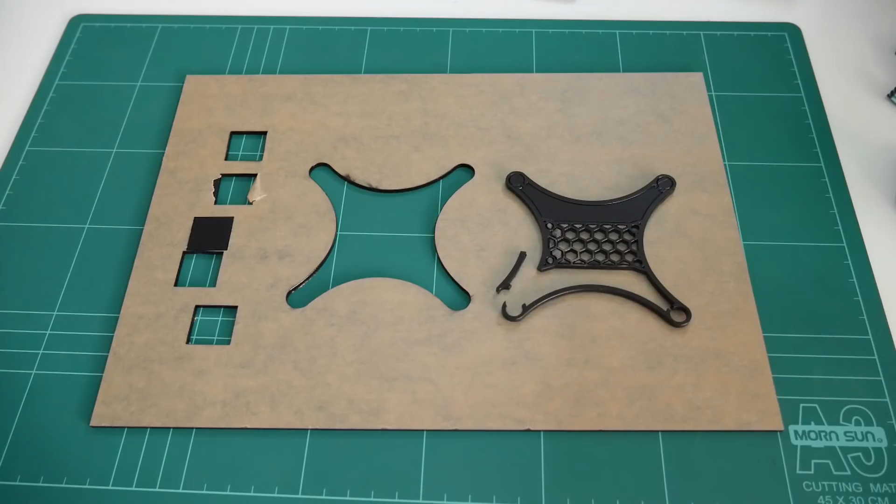In a previous video, I demonstrated cutting 3mm acrylic using a 2.5 watt laser attached to my 3D printer. But when cutting a complex shape, such as this mini quadcopter frame, I experienced a problem whereby the outer perimeter cut would cause the entire piece to lift.

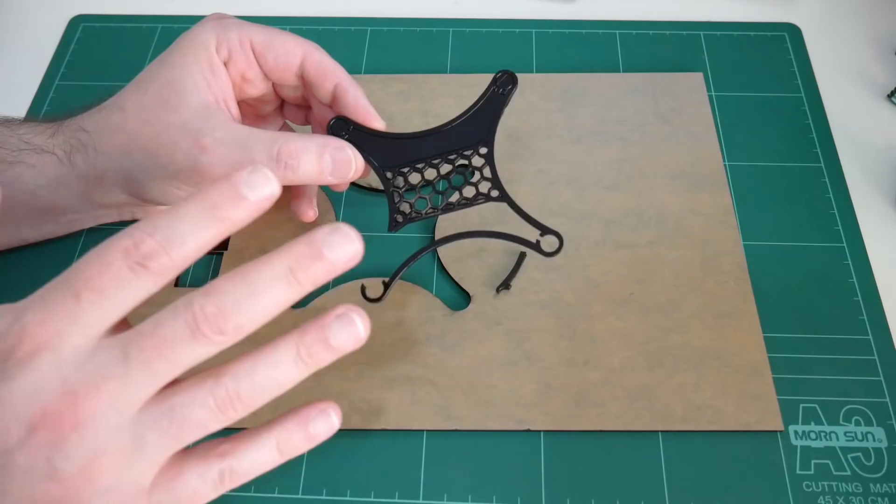Now, as this piece took 3 passes of the laser to cut all the way through, this meant the next laser pass wouldn't line up with the previous laser pass, causing some areas not to fully cut all the way through. So in this video, we'll use Fusion 360 to create our laser G-code, laser cutting the inside shapes first, followed by the outer perimeter.

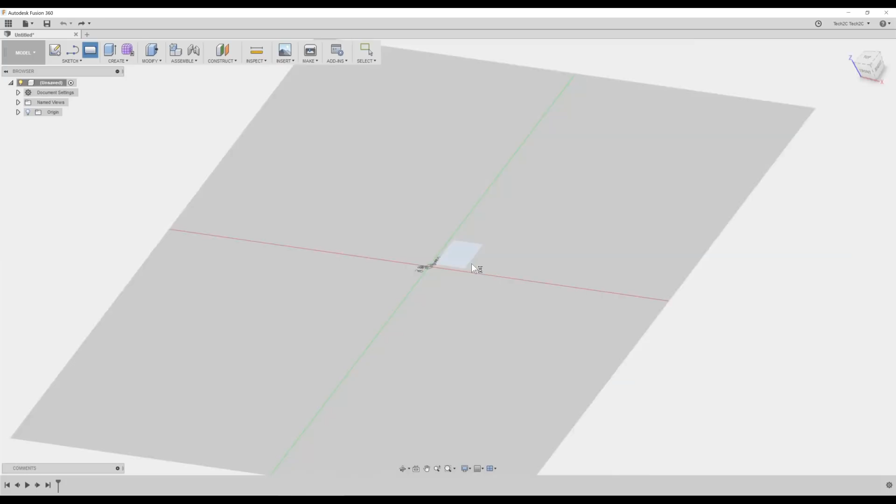To begin, in Fusion 360, first let's create a square on the XY plane. Starting from position 0, the size will be 200mm by 200mm. Highlight this square, right click and select construction. This is the size of our build platform.

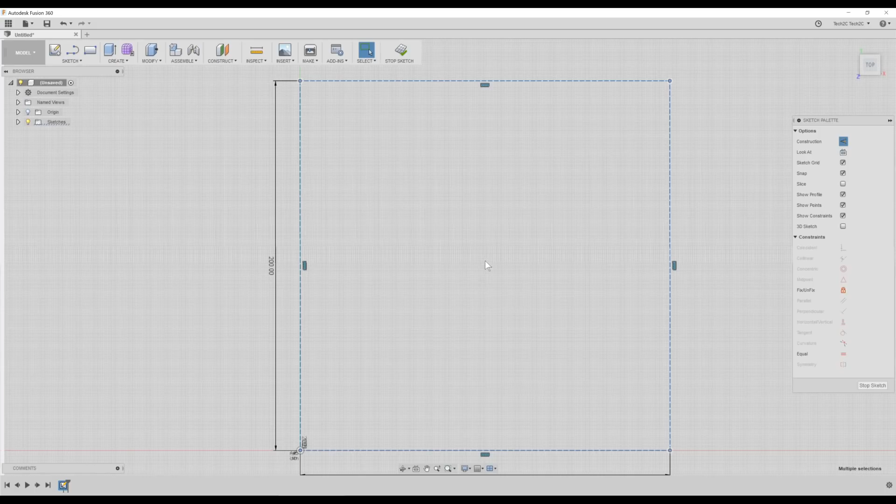Now to import the exact same micro quadcopter frame into Fusion 360, it's currently an STL file, so we need to be able to convert that into a solid before we can work with it. To do that, we'll go to Create Base Feature, then Insert Mesh, and we can choose our STL file.

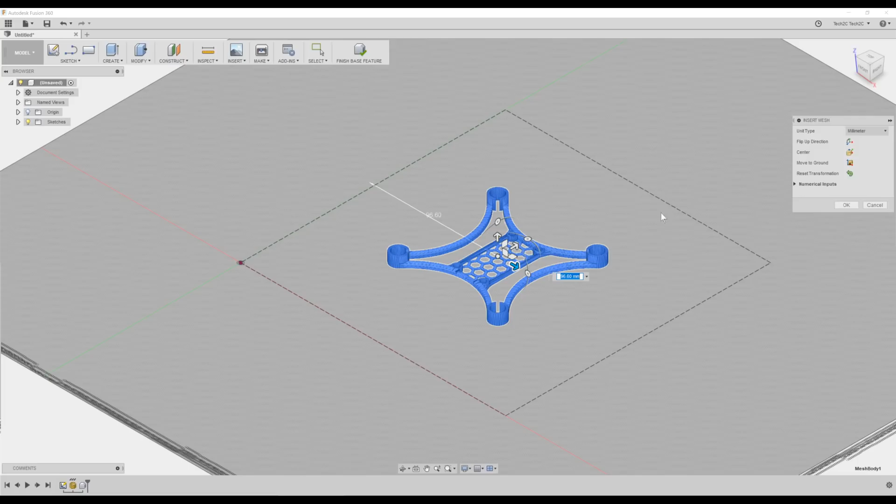We want to drag this file into the square we created earlier, just to make sure that the size is well within our build platform area, which it is, and select OK. Now that we've inserted our STL file into Fusion, we can convert this into a solid. To do that, right click on the object and choose Mesh to BREP.

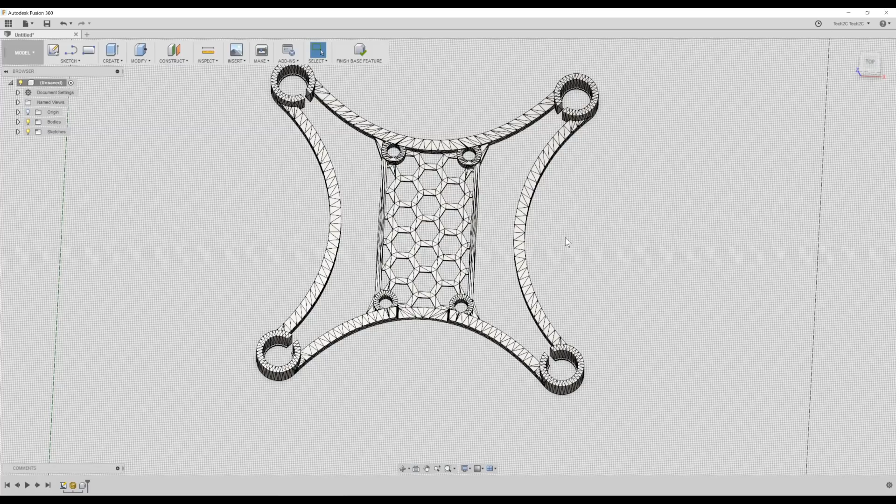Fusion has now converted this into an object, and if we zoom in, we can see that we can actually select the individual vertices, faces and lines. Now we can choose Finish Base Feature.

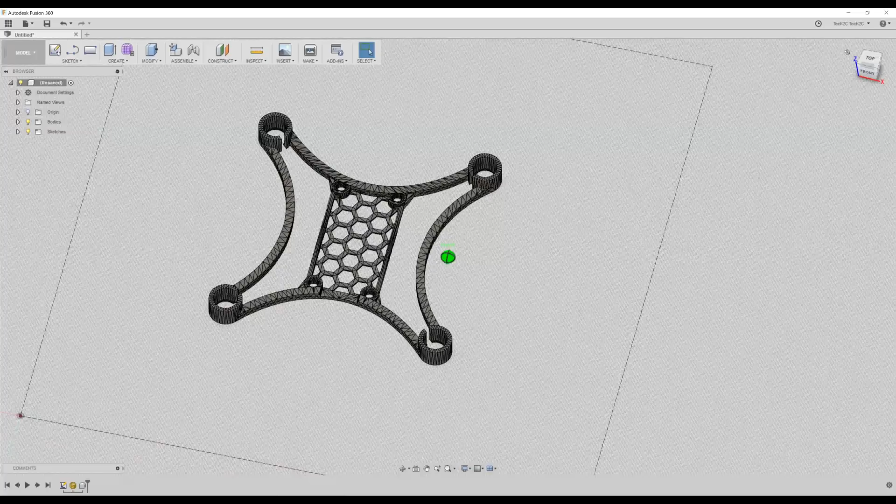What we want to do here is project the bottom shape of this micro quad onto the XY plane, because all we want is the bottom shape. That's all we can laser cut with our laser. To do that, from the sketch drop down, we'll choose Project, and it's asking for which plane we want to project, and the plane is the X and Y plane.

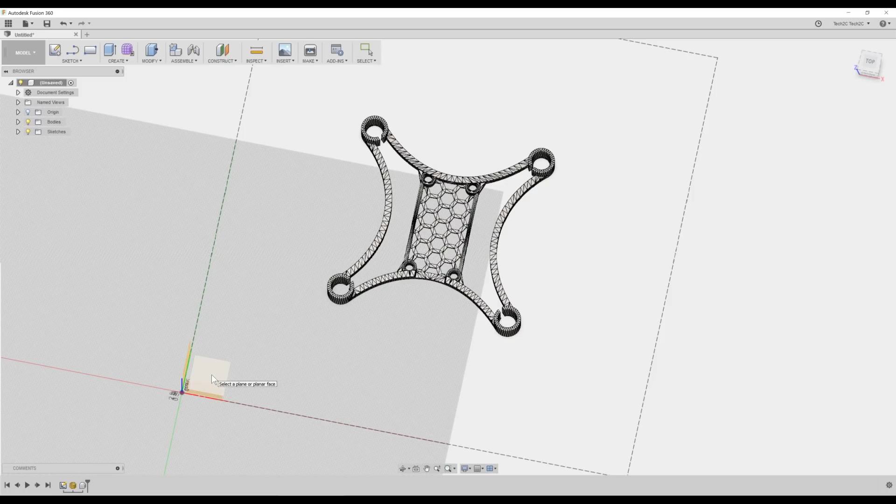From the right hand side, select Bodies and select the quadcopter frame. This does take a little while to finish, and there it is. It has selected everything on the X and Y plane for this particular shape. Choose OK and Stop Sketch.

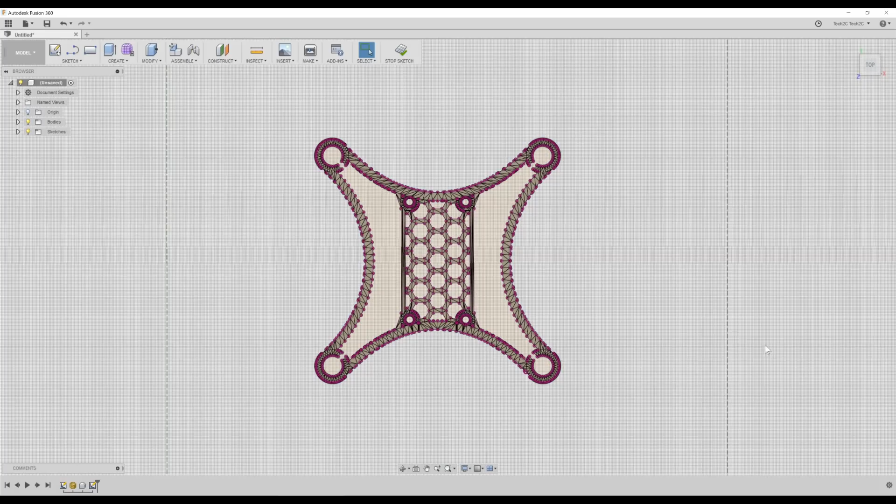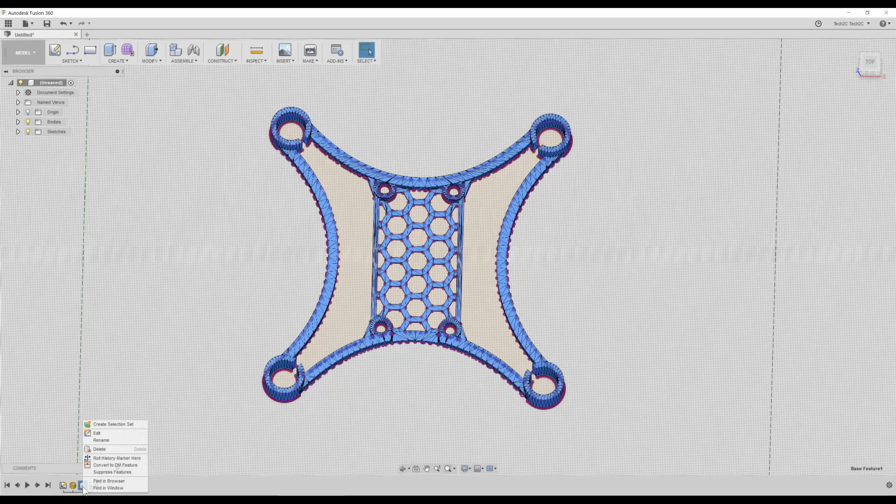Now that we have our sketch on the X and Y plane, we no longer need the 3D model, so we can now delete it. So in the timeline, we can right click the object and choose Delete, and right click the mesh and choose Delete, which just leaves the outline from the X and Y plane of this particular object.

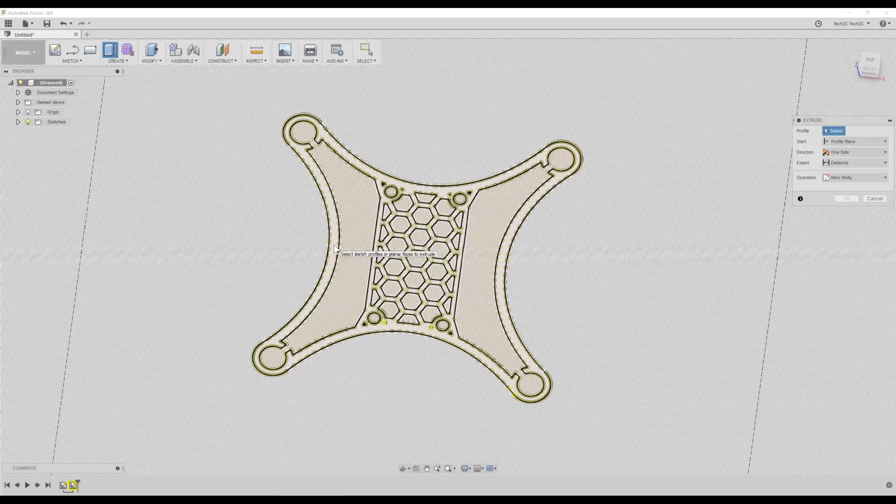Now we need to give this some depth, so the CAM process in Fusion 360 can work with this particular shape. To do that, we'll choose Extrude from the menu, click on the shape, and we'll extrude, say, 1mm. And there it is. There is the 2-dimensional shape of this mini quadcopter that we're going to laser cut on our 3D printer.

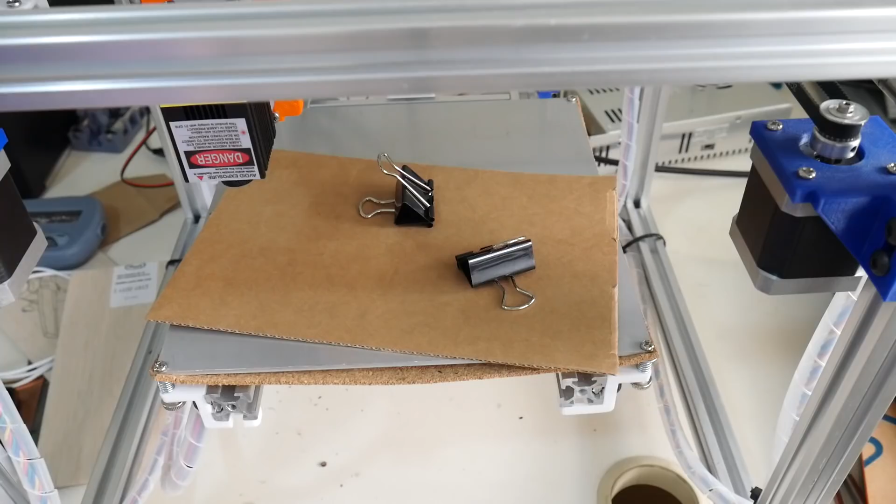For this example, we're going to cut that same micro quadcopter shape, but out of cardboard instead of acrylic, just to save a bit of time here. But we're still going to need 2 passes to cut cleanly all the way through this cardboard, but we can do that at 5mm a second, so that shouldn't take too long.

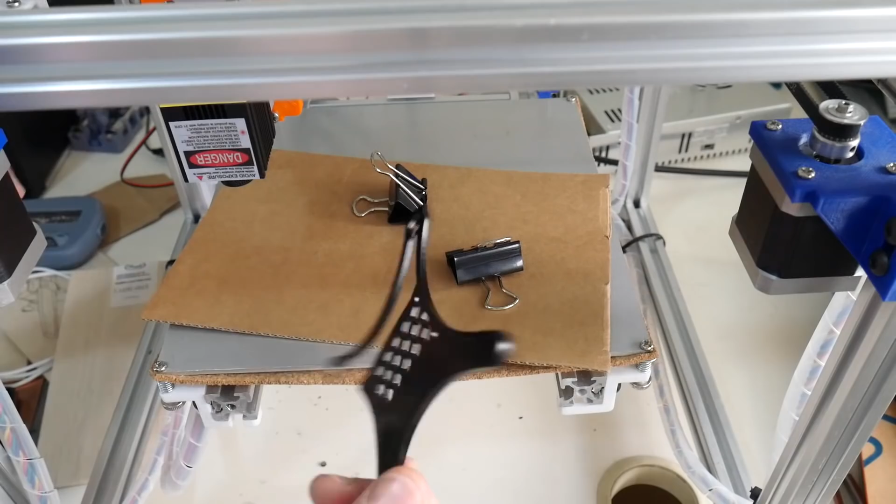So let me grab the existing shape. So here is the quadcopter out of acrylic. What we're going to do first is instruct Fusion to cut all these hexagonal shapes in here first, as well as the voids between the arms of the quadcopter. So we're going to ask for 2 passes at 5mm per second. Then we're going to ask for 2 passes at 5mm per second for the outside perimeter.

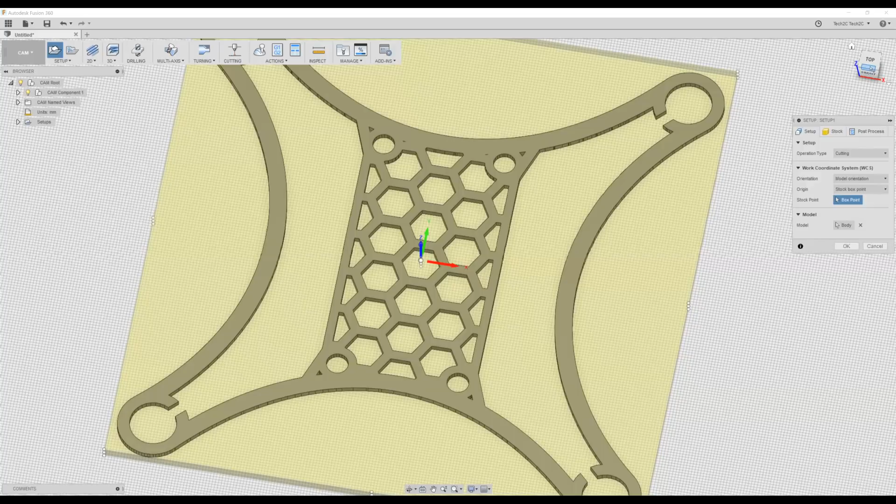From the top left menu, we'll choose CAM. The first thing we need to do is create our setup. From the right hand side, the operation type will be cutting. For our orientation, I'll zoom in a bit and rotate the screen. You'll notice the initial starting point is the center of the quadcopter frame. We actually want the bottom left hand side and the top of the stock. So right about there.

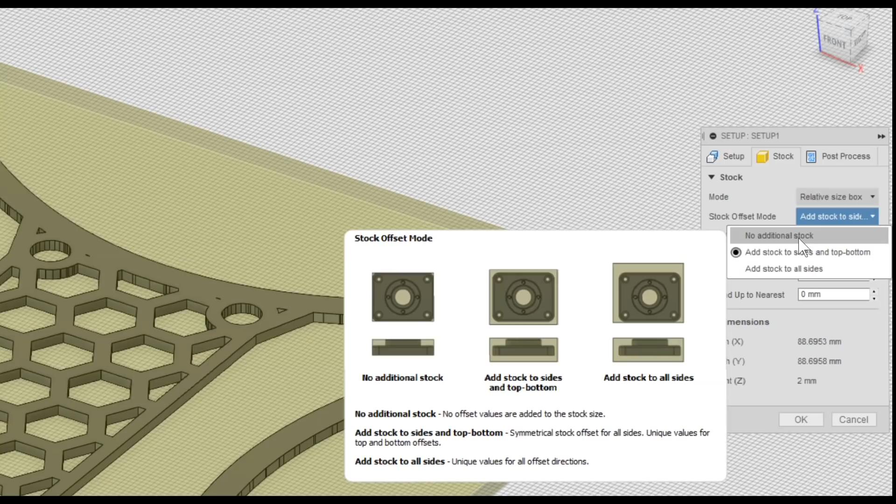Going to the stock tab, we want to change the stock offset mode to no additional stock and choose OK. Now we're ready to create our toolpaths. From the menu along the top, choose Cutting.

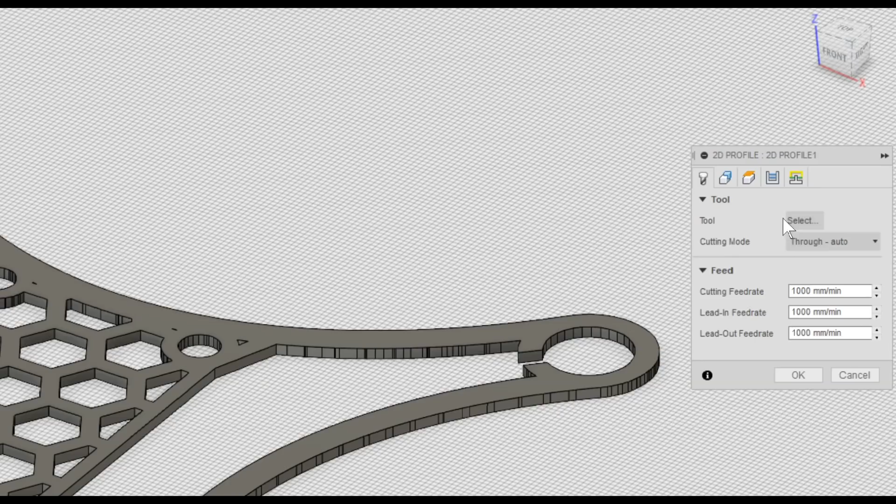The first thing we'll do is we'll actually create our tool. Our tool in this instance is just the laser. To do that, let's hit Select. From the right hand side, we'll choose Create New Tool. In this case, Waterjet, Laser or Plasma Cutter.

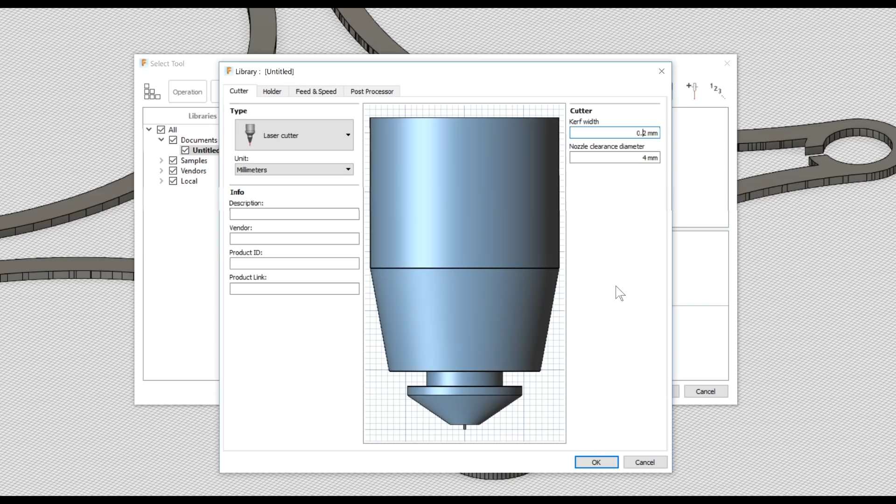From the type, we'll choose Laser Cutter. And for the kerf width, we'll change it from the default 2mm to 0.2 millimeters. Select OK and OK. For the cutting mode, we'll choose Vaporize. That just sends maximum power to the laser, so the M106 command S255.

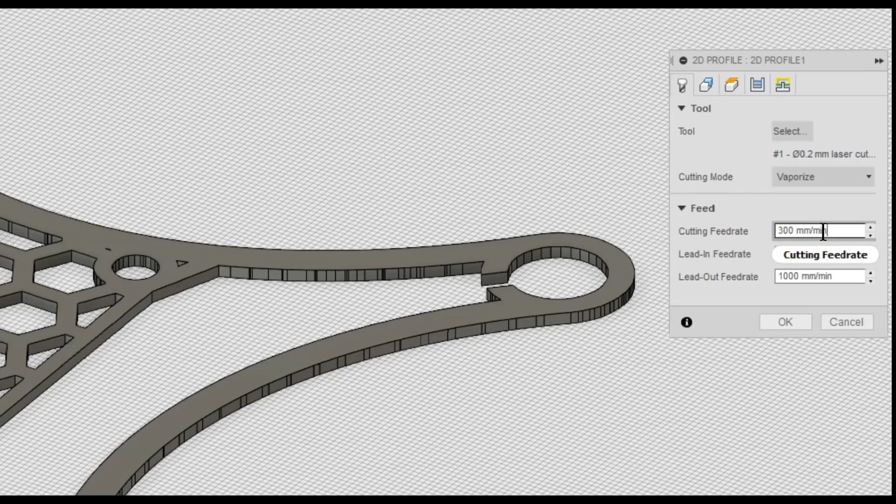And for the cutting speed, so this is the cutting feed rate, we want to cut this at 5mm per second, which is 300mm per minute. So we'll change the cutting feed rate to 300mm per minute.

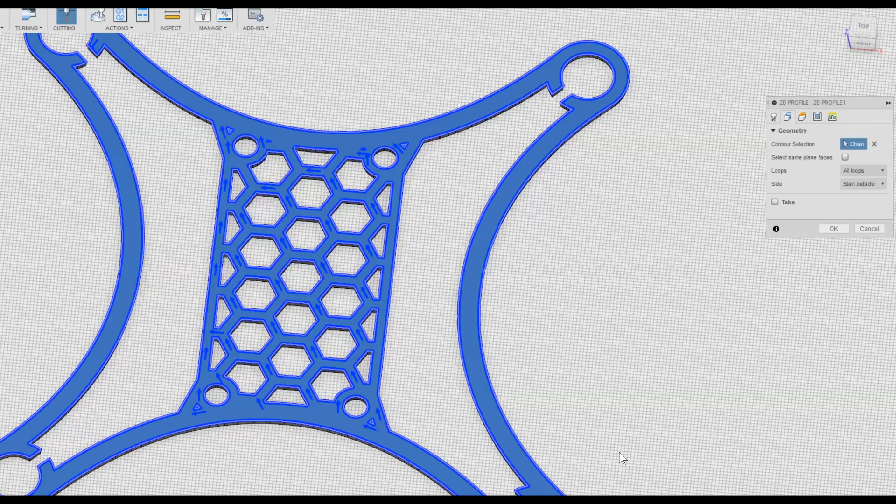Going across to the next tab called Geometry, this is where we're actually going to select what we want to laser cut. Now, we actually want to select just all these internal gaps, so all these hexagonal shapes and the voids between the arms. If we wanted to, we could just select the top face and it would automatically select every single shape that we see here, but we don't want to do this because it's going to cut everything at the same pass, including the perimeter.

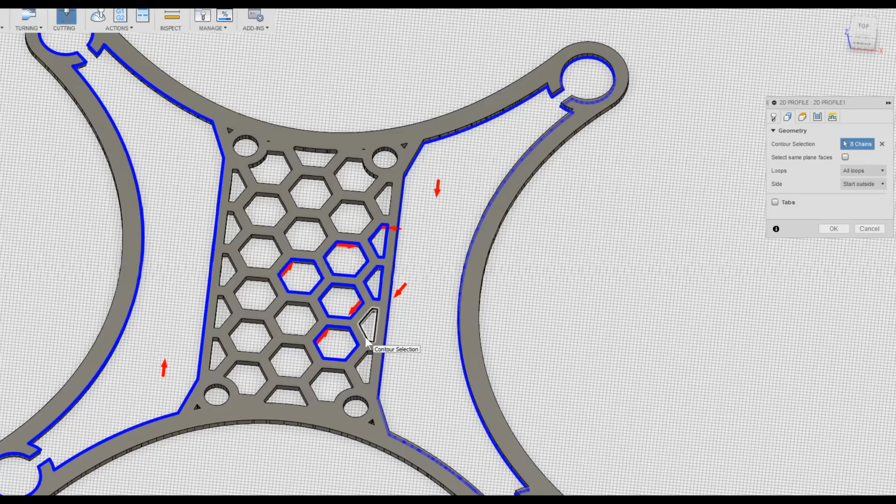So I'll unselect that, and I'm going to go through and select all the individual hexagonal shapes and even the voids between the arms. This is the power of Fusion 360, or a program like Fusion 360, which actually allows you to choose what you want to laser cut rather than just blindly following what the shape is.

And in fact, if I zoom in a bit here, let me reorientate the shape a bit and zoom in up here, you'll see as part of this particular design that I've downloaded from Thingiverse, there's these couple of little voids here. There's one there and there's a smaller one over here. I actually don't want those to be laser cut out of this, so I just won't select them.

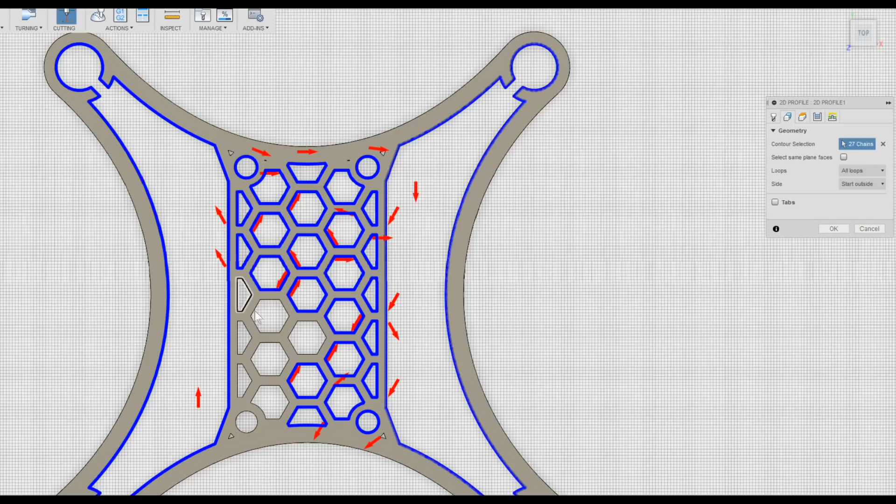Okay, I have selected all of the shapes that I want to cut as part of this initial laser cut pass. The next thing to do is move across to the Heights tab, reorientate the view so we can see what's going on. Here we want to set the top height to be 50mm. 50mm is the focal point of my laser from the top of the cardboard. That's going to actually cut this particular shape.

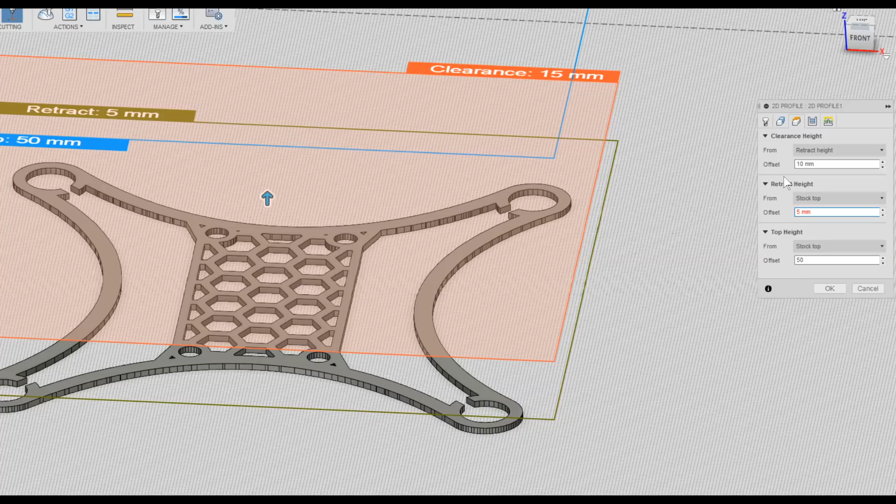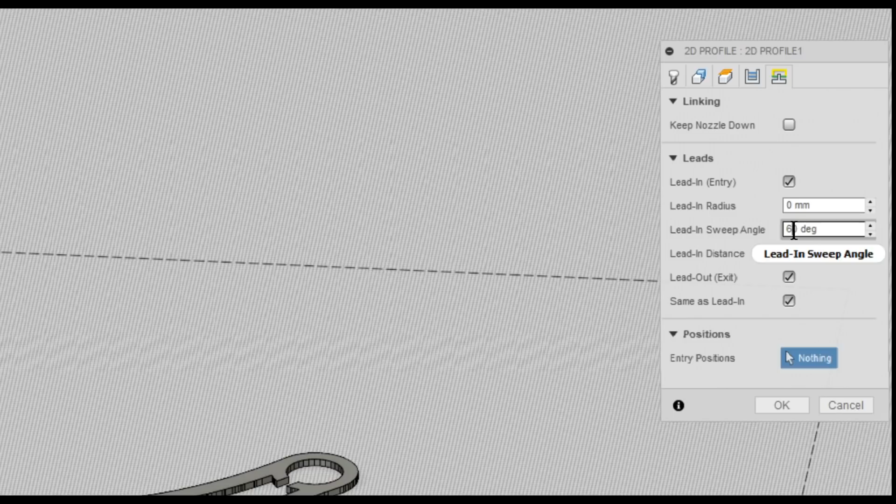We want to change the retract height to that exact same 5mm, but we want to change the clearance height to 0. We don't need that. Moving across to passes, we want to change the sideways compensation to center. And lastly, moving across to linking, we want to change the lead-in sweep angle to 90 degrees and select OK.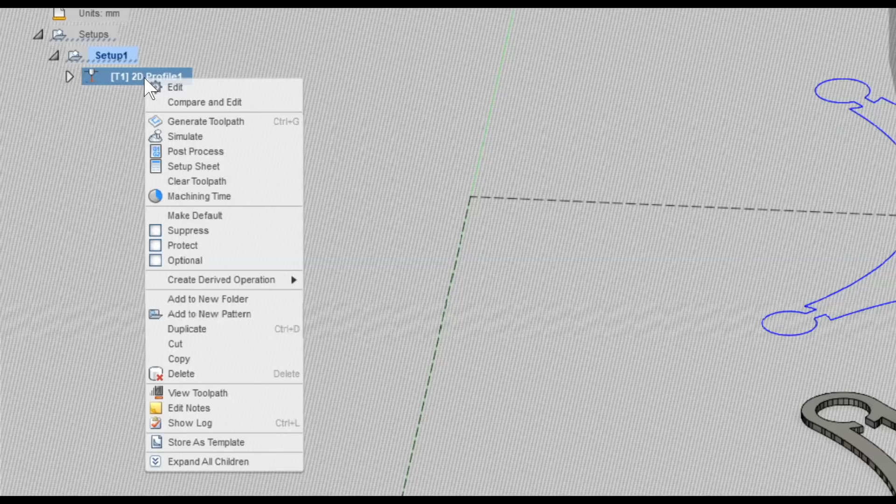So we have just made our first toolpath. The laser is going to cut all the shapes that we've selected at 5 millimeters per second. But it's only going to do that once. We want to do this twice just to make sure that we're cutting right through the cardboard. Well, rather than creating another toolpath manually, we can actually duplicate the toolpath we've just created. To do that, on the left-hand side, we'll right-click the toolpath and choose Duplicate.

And after a few moments, we've created a second toolpath which is identical to the first. But what we'll do, we'll actually name these so we know what they are. So this first one I'll change to Inside Laser Cut 1. And the second one I'll change to Inside Laser Cut 2.

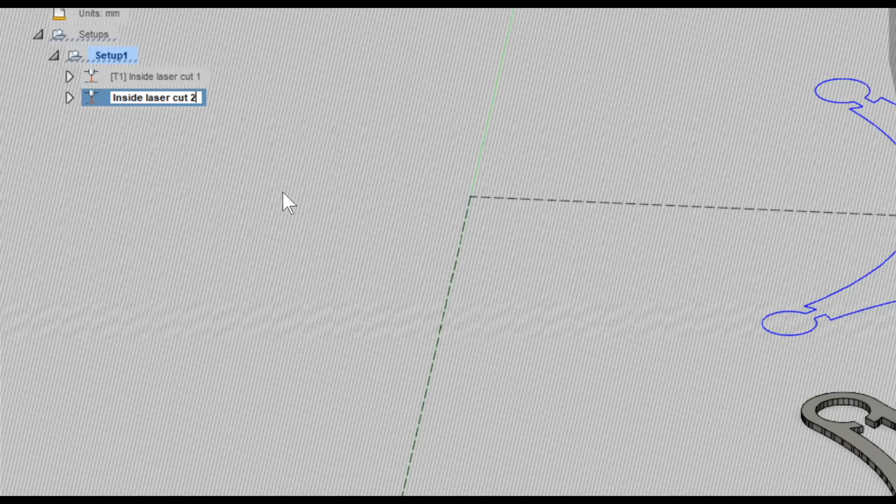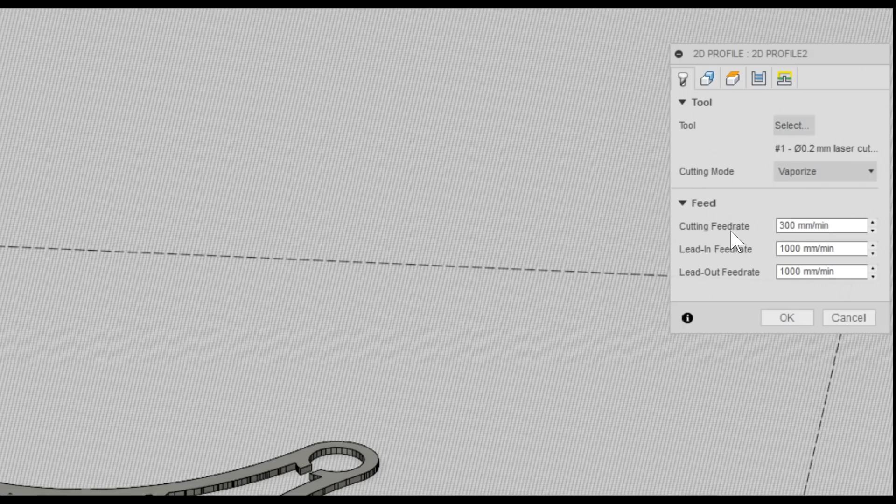Okay, now we can create our toolpaths to cut the outside perimeter of our mini quadcopter frame. Again, up the top we'll choose Cutting. The existing tool is already pre-selected. We can see this 0.2 millimeter laser cutting tool is already there, so all we need to do is change the cutting mode to vaporize. You'll notice our cutting feed rate is already at 300 millimeters per minute, which is what we want.

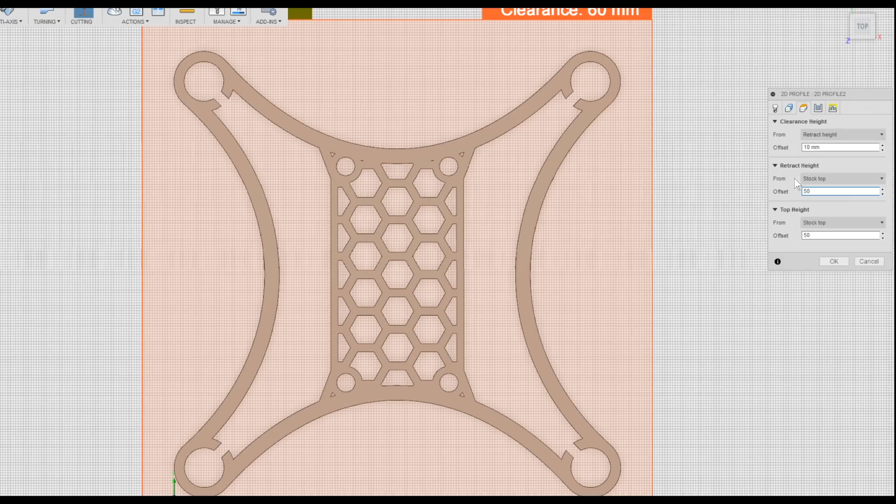Moving across to the Geometry tab, here all we want to do is select the outer perimeter. Pretty simple. Move the mouse until that highlights and click it. Moving across to heights, we need to change this again to 50 millimeters for the top height, 50 millimeters for the retract height, and 10 for the clearance height. Moving across to passes, the sideways compensation, change that to center. And lastly, moving across to linking, we'll change the lead-in sweep angle to 90 degrees. Select OK.

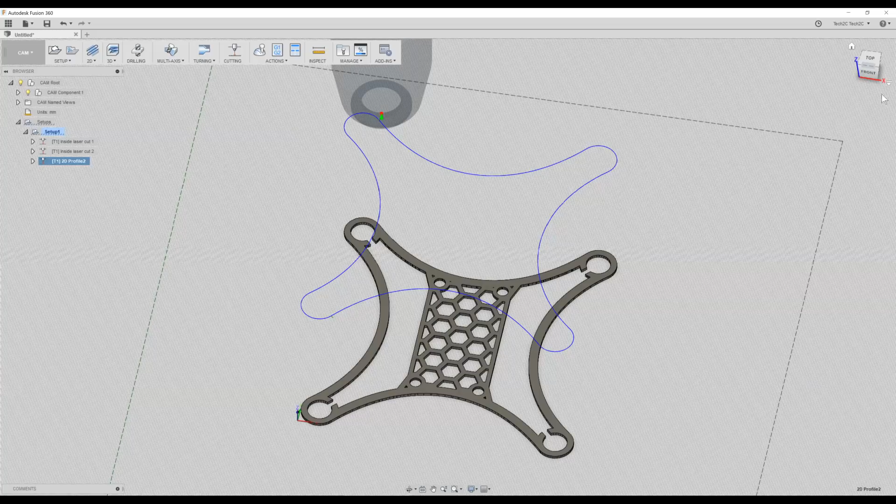And there it is. That is the outside pass for the laser cut. But again, we want to cut this twice. So to do that, we'll right-click on the toolpath and we'll select Duplicate. And we'll give this a name. So just like the other one, we'll call these Outside Laser Cut 1 and Outside Laser Cut 2.

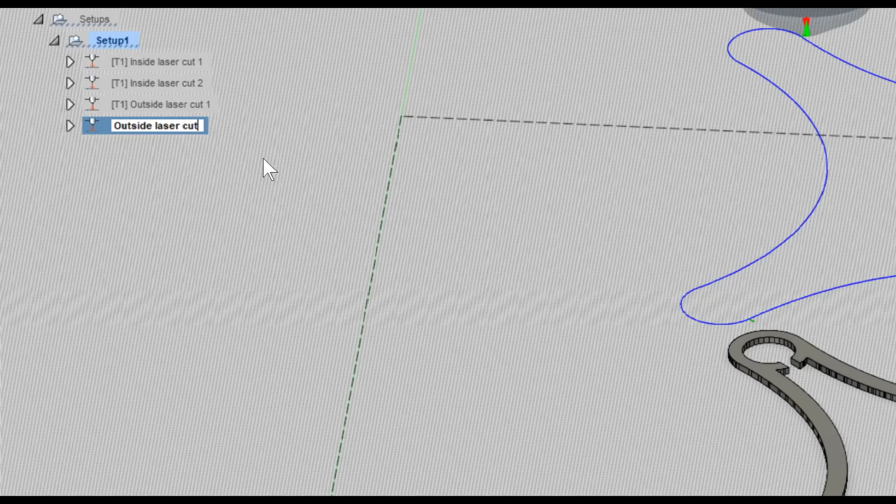Before we export this as a G-code, we can actually simulate how this is going to work. To do that, highlight the top of the tree being Setup 1, select Simulate, and you can just hit play. And here we can see 50 millimeters above the cardboard, it's going to laser cut just the initial shape first. We can see down the bottom how fast this is being played. We can actually speed this up a bit.

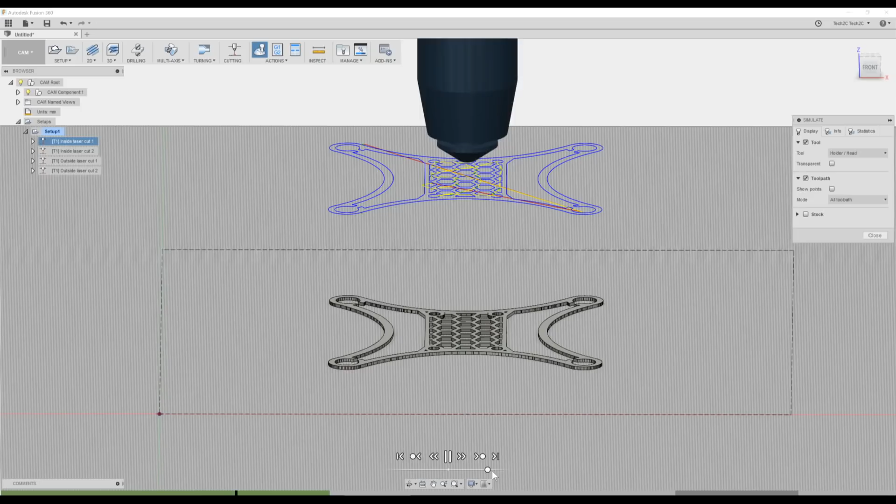So we can see this is the first pass. Now this is the second pass. It's doing the same thing. Now it's the perimeter of the third pass, and finally the perimeter of the fourth pass. And on the simulate page on the right hand side, it is telling us the machining time is going to take 10 minutes and 9 seconds to complete this laser cut.

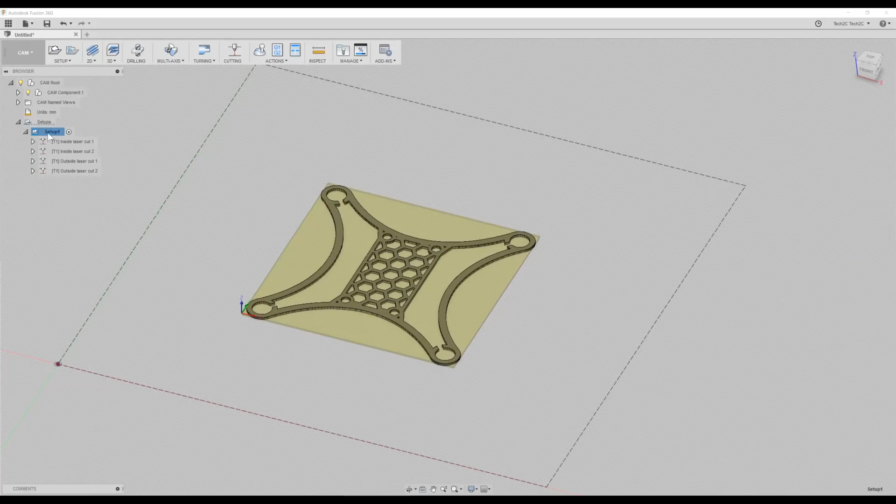Finally, we can export our toolpaths as G-code. To do that, on the left hand side, ensure the setup is highlighted, not one of the toolpaths, otherwise it's just going to export that individual toolpath. By choosing the top of the tree, it'll export all of this in one G-code file. We'll choose Post Process, and you want to use the Hypercube CPS file that I've created.

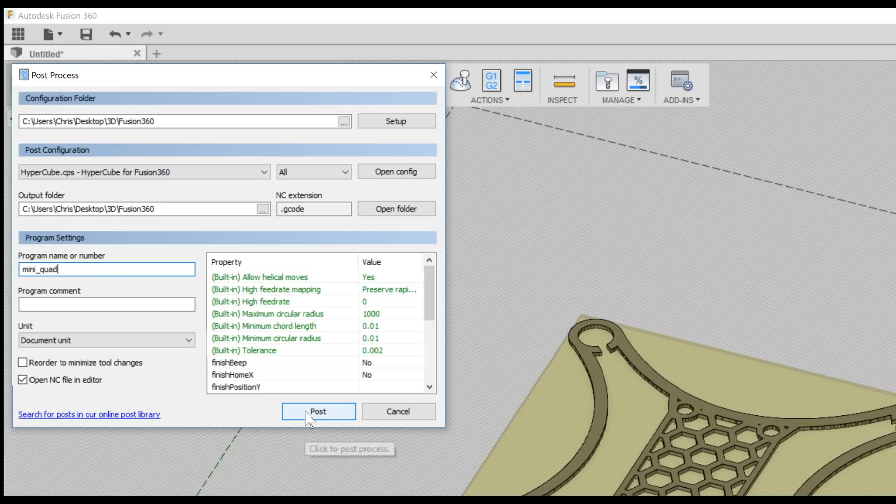The only property that we need to change from the Hypercube CPS file is the start position Z. By default, I think it's 2 millimeters. We don't need to add any Z height to this because we're actually going to be starting at 50 millimeters above the piece. So just change that to 0. Give your program a name, Mini Quad, and then select Post. Save it in a directory and choose Save.

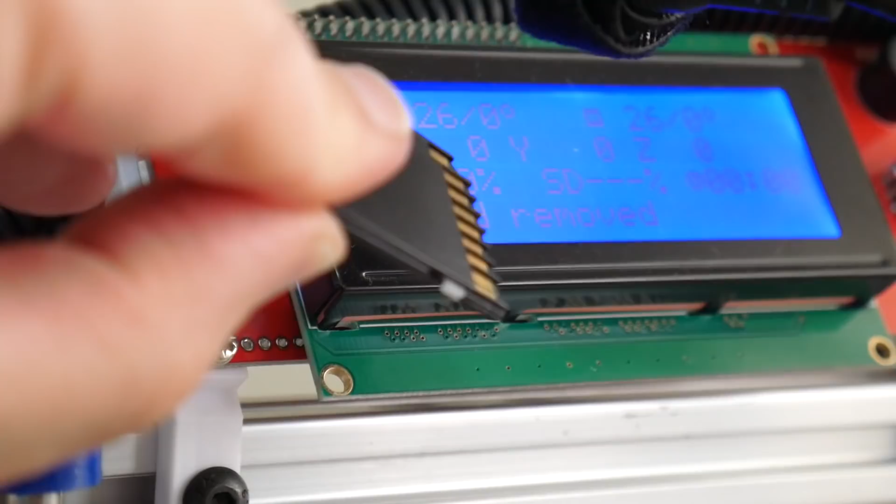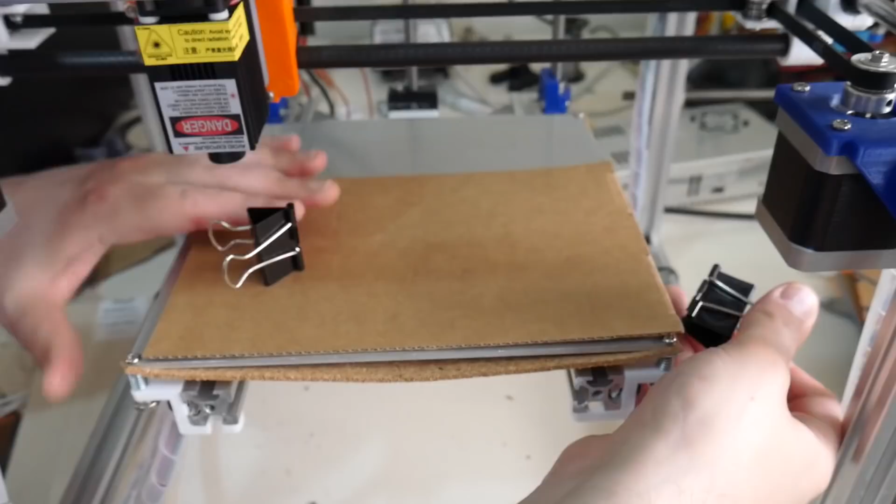Secure the cardboard with binder clips, or you could just use tape to secure the cardboard. Here we don't want the cardboard to move at all during the laser cutting. We're doing 4 passes and we want each pass to be bang on the previous layer. Now we want to start the laser touching the cardboard because it's going to raise 50 millimeters from the starting position, and that is the focal length of my laser, and it's going to start at the bottom left hand corner. That's where we set it up in Fusion.

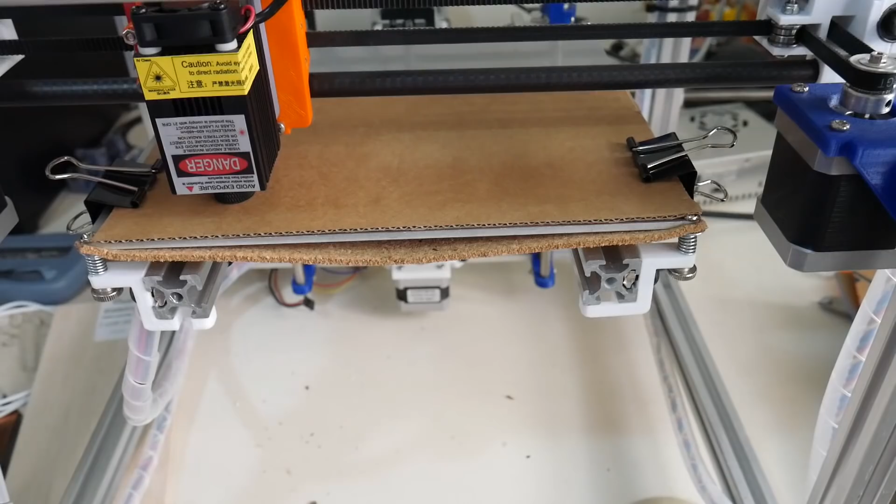So I'm choosing the bottom left hand corner of this cardboard, line that up, I'll show you that. So it's resting on there, as you can see. I've got it loaded into Pronterface. Make sure you're wearing your safety glasses, of course, and choose print.

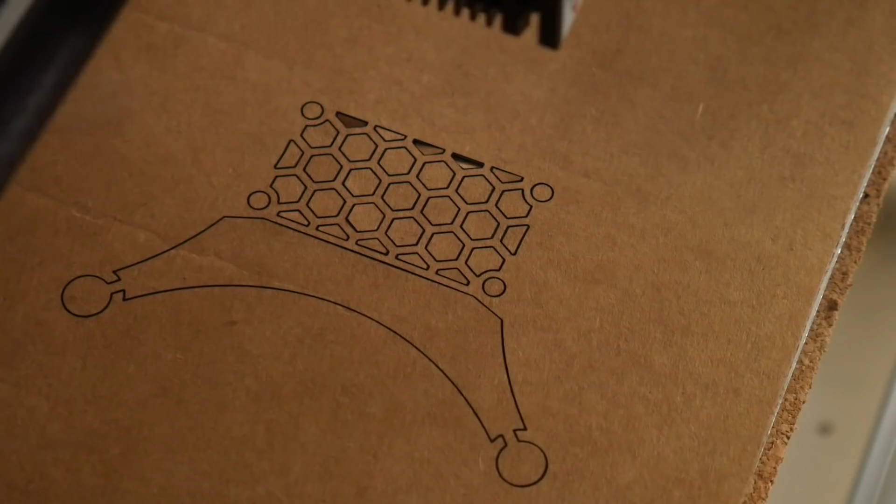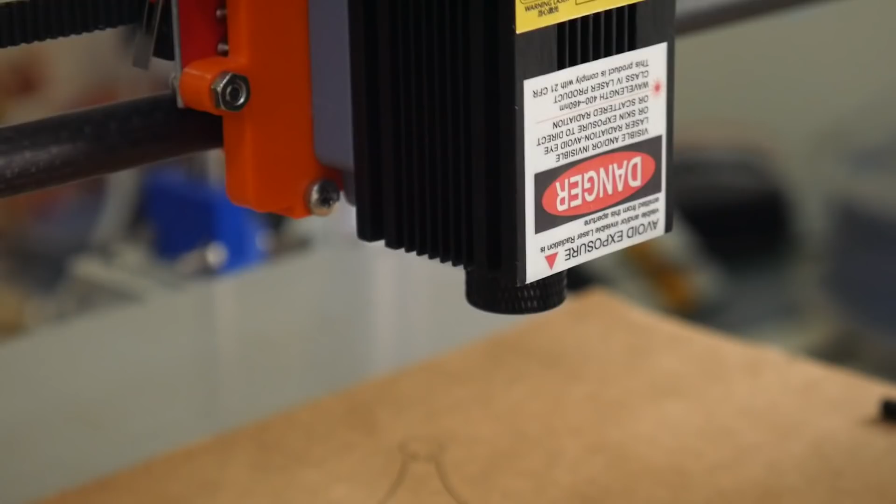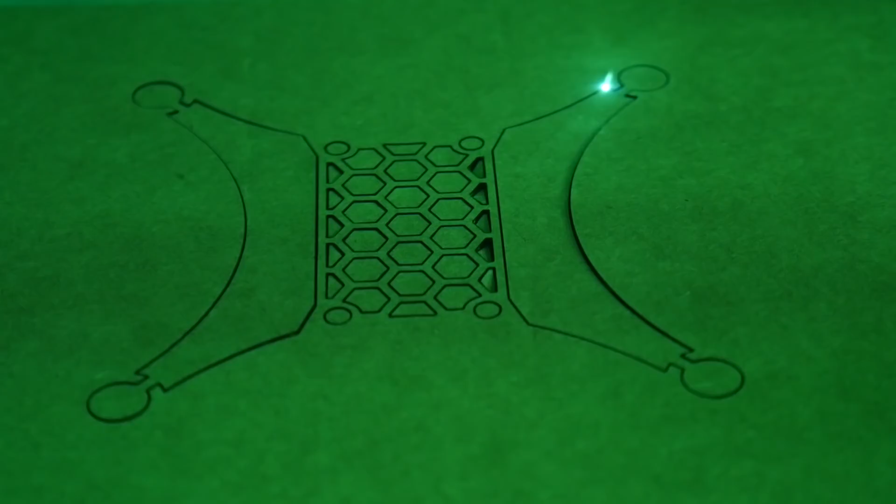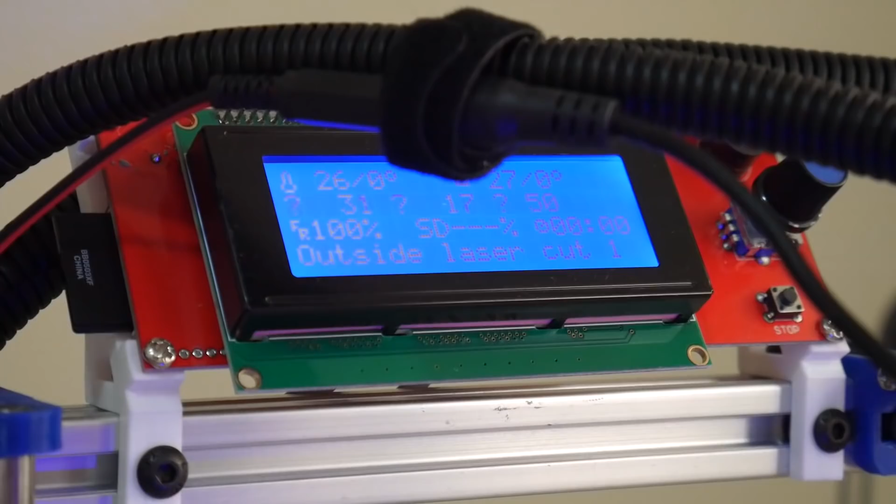It's now cutting the perimeter. And we can see on the display it says outside laser cut 1. This is the second pass. Outside laser cut 2. You can see it's starting to lift on the corner. That's it, complete.

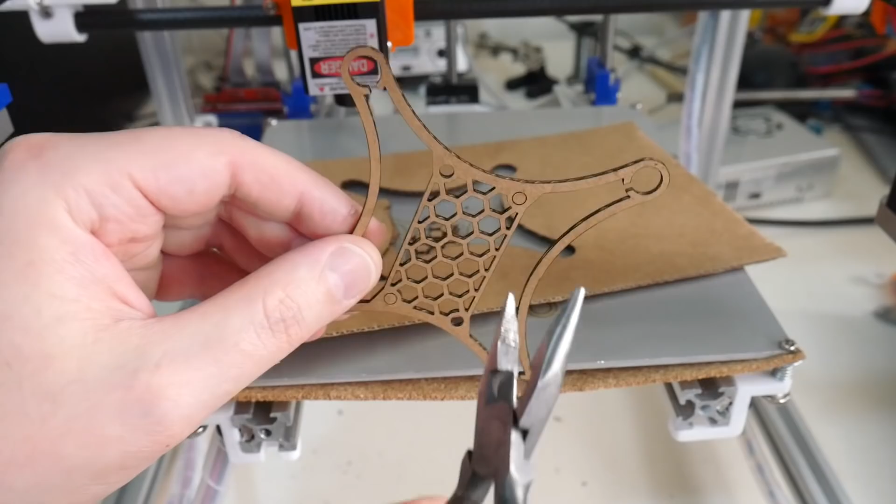Let's check out the results. Oh yeah, that's right through. Falls out. Of course, cardboard, easy to cut. Check that out. A few of the mounting holes need to be poked through. They just haven't fallen out on their own. Just use pliers here to poke through that one and that one. Easy.

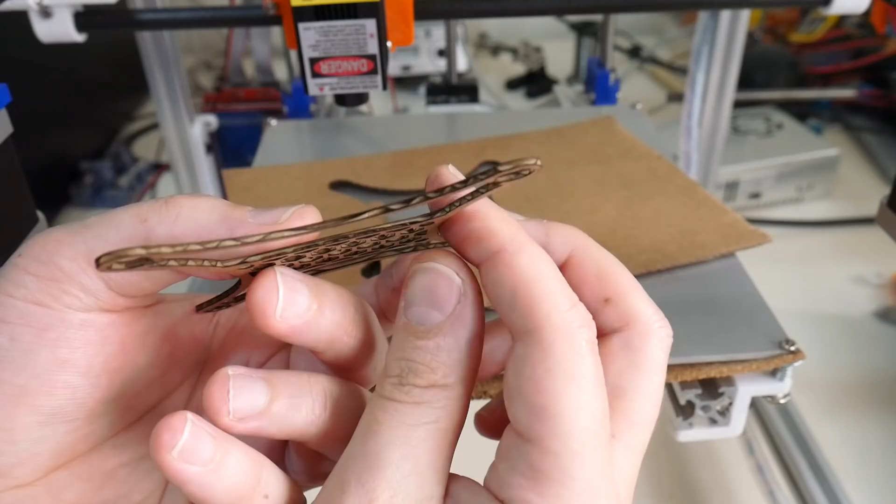It's surprisingly rigid for its shape, or for what's left of the cardboard. This honeycomb shape is actually quite strong on this particular design. However, being just flimsy cardboard, especially out here, it wobbles a bit too much. Probably not the best material for a mini quadcopter frame, but you get the idea. And Pronterface tells me this took 9 minutes and 50 seconds.

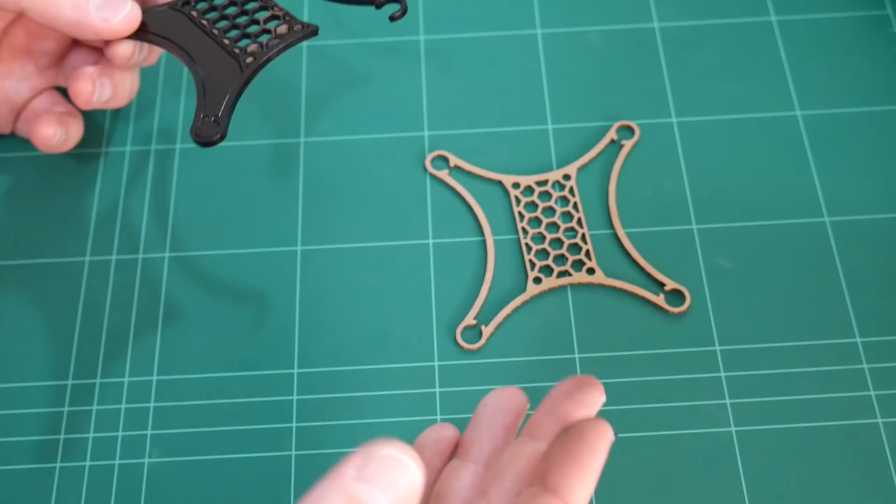And there you have it. Using Fusion 360 to laser cut this mini quadcopter frame, the inside shapes first, followed by the outside perimeter. And you can use the same techniques that I've shown in this video to laser cut this same object or other objects out of acrylic. So you would just reduce your speed from 5 millimeters per second down to 2 millimeters per second, and you'd up your passes from 2 to 3, but you'd keep the same inside shapes first, followed by the outside perimeter last.

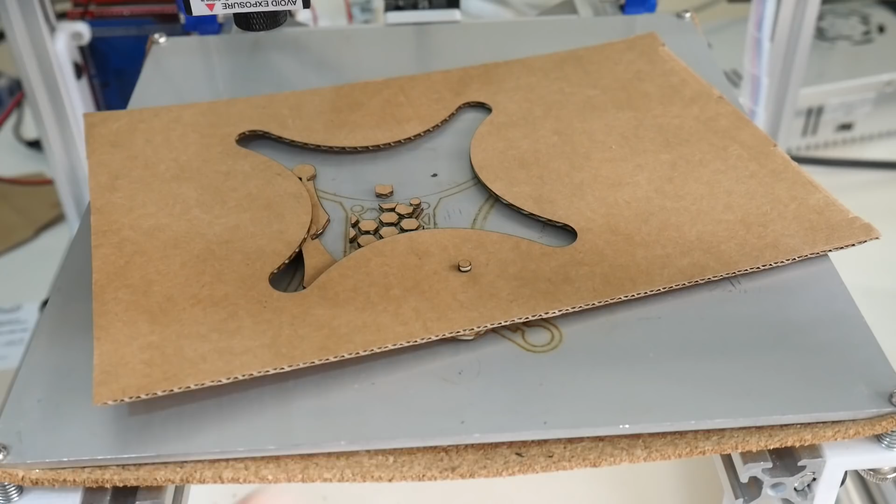Software like Fusion 360 is the reason why owning a laser or a drill or even a pen mount to attach to our 3D printers makes it so worthwhile. Here I demonstrated full control on what you want to cut and when it gets cut. Really lends itself to how versatile our 3D printers can be. Have to clean up all this afterwards.